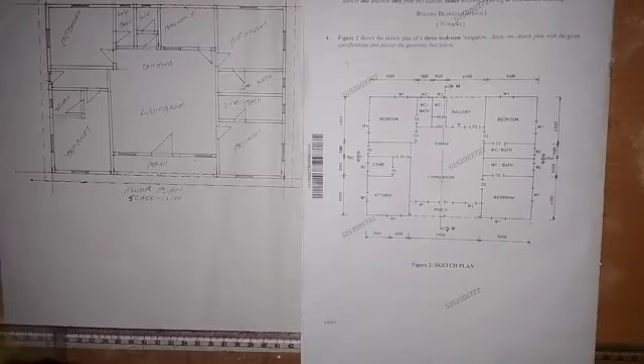Here we are going to be working on the front elevation of this building, as we have worked on the floor plan. So now let's look at what the front elevation will look like. Though we are not asked to draw the front elevation, we are asked to draw the left end elevation, but I want us to make a drawing of the front elevation. Let's see how that front elevation will look.

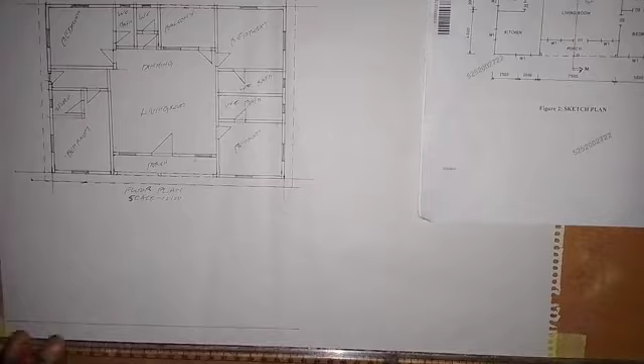Okay, now the first thing that we are going to do for the front elevation is to draw the ground level line. So just draw a horizontal line like this for the ground level line, and then we indicate this as the ground level line. We write GL at this point, so make sure you write it. That's for the ground level line. So that's the first thing that we are going to do.

The ground level line is where the floor on the outside of the building is, where you step on before you enter into the building. That is the ground level line. Okay, all right.

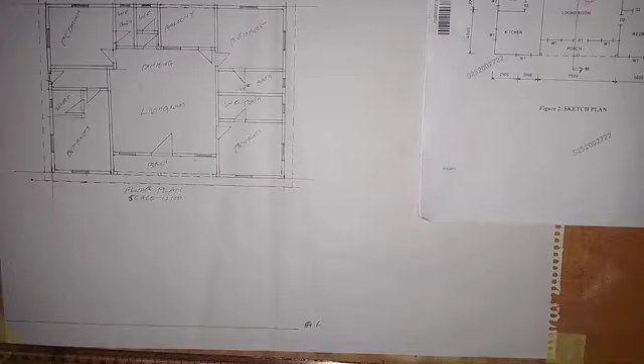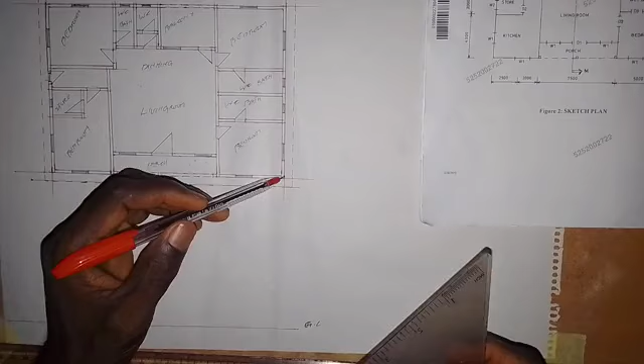So the next thing that we are going to do is, by the time I'm looking at this building in this direction, I'm going to see the edge of this wall. I will see this window, then there's a column here that I'm going to see. I will also see this column, and this column here. I will see this window, I will see this door, I will see this window, and I will see this window, and see the edge of this wall. So those are things that we are going to put here in the front elevation, apart from the roof.

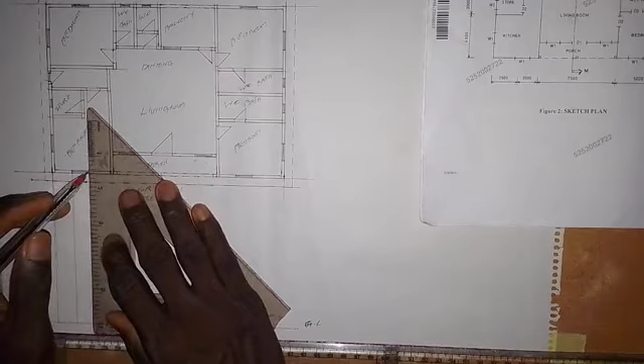So let's start from here. I'm going to draw a vertical line down here. It's okay. So draw a vertical line down here. Then for this window, I'm going to draw a vertical line down like this. Here also I will draw a vertical line down like this for the width of the window. This makes my work fast. And then at this point, I'm going to draw a vertical line down here.

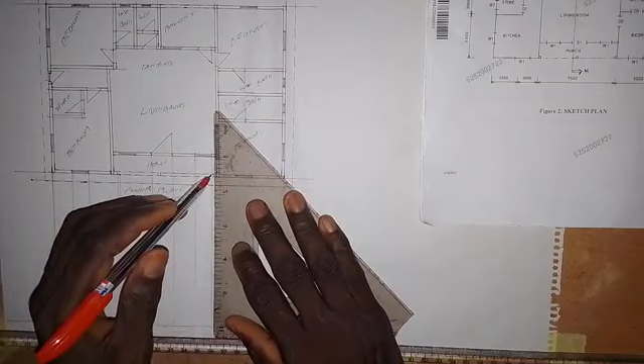So here also I have a window here, so at this point I will take this vertical line down. And coming here also, I will draw a vertical line down here. And then for this door, I will draw a vertical line down, and at this point also I will draw a vertical line down. Okay, so at this point here I will also draw a vertical line down here, and then here I will also take a vertical line down. Then here I have a column, so like this, take a vertical line down.

So then you can see this window also, I will draw this vertical line for this window, and then at this end here I'm going to draw a vertical line. That's the edge of the wall.

All right, so the next thing that we are going to do is to take a measurement of the floor level. So I will take 1.5 millimeters, and we are going to draw a horizontal line here like this, for the floor level.

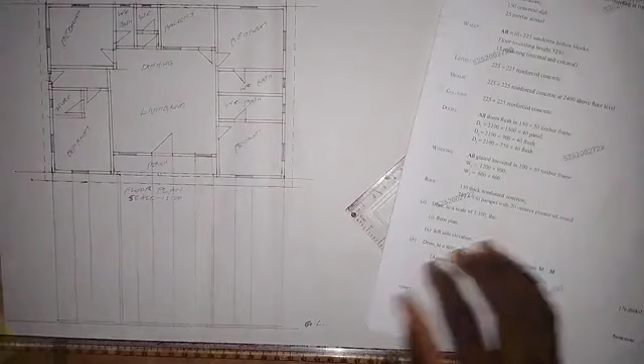Okay, so having taken the measurement of the floor level, the next thing that we are going to do is go to the roof. So we come back and work on the other components that we are going to see here in the front elevation. So for the floor level, we come here.

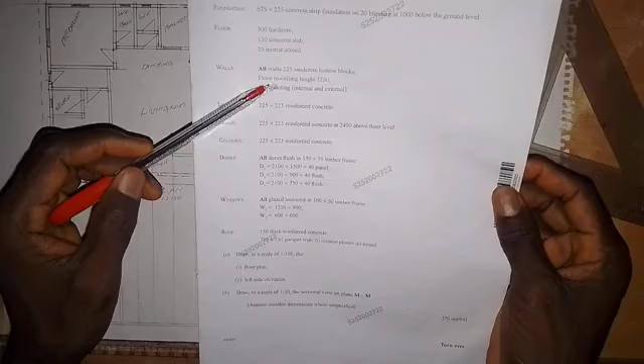So for the floor to ceiling height, floor to ceiling height is given here as 3,250. If we divide that by 100, that gives us 32.5. So I will take a measurement of 32.5 from this floor level line. I will take 33 millimeters. This is 33 millimeters here.

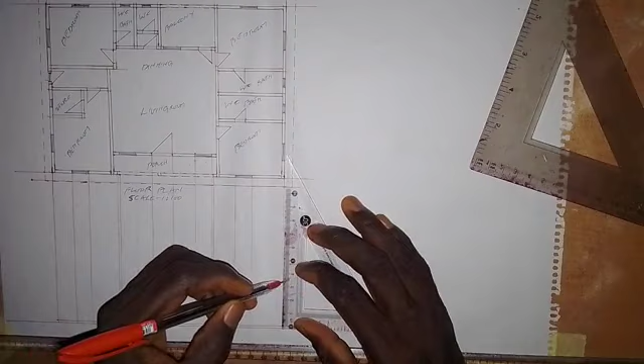At this point here, I'm going to draw a horizontal line from here to here.

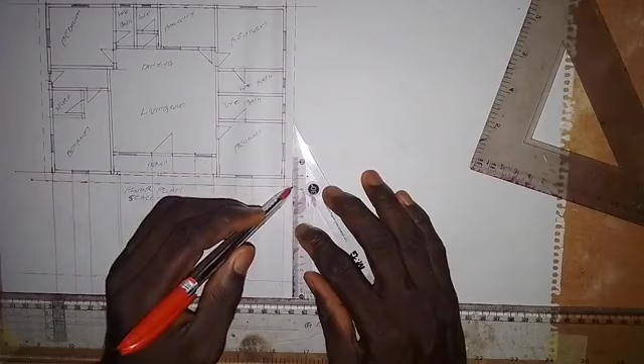All right, so then the next thing that we are going to do, this is the projection that we have here, we have to bring it down, down to this point. So we have not yet looked at the type of roof that we are given, we are going to look at it. So we also need to draw this line down here for the eave projection.

Alright, so now let's go to the roof. For this type of roof, they specified 150 thick reinforced concrete and a 750 by 150 parapet with 20 cement plaster all round. This type of roof is a parapet roof, or flat roof, parapet or flat roof. That's the kind of roof we have here.

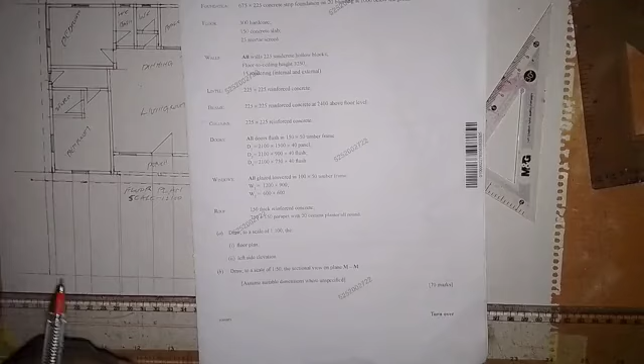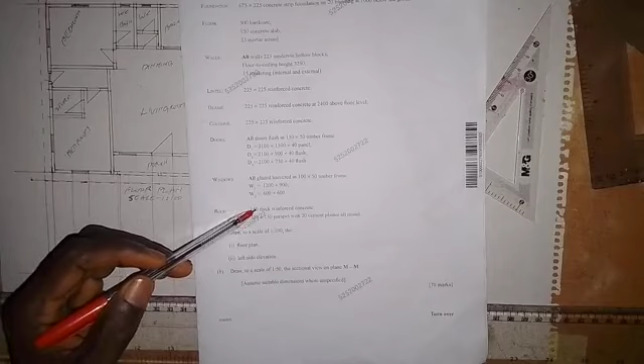So we have a concrete slab of reinforced concrete, 150 thick. Then we have a parapet of height 750 over it, and the thickness of that parapet is 150. So we are making use of this 750.

So 150 by 100 will give us 1.5. But I will take it as something like, for us to be able to see it, I will take it as 2 millimeters. So it is approximately 2 millimeters at this point.

So for the reinforced concrete, we are going to draw a horizontal line from here to this end here. So we have the horizontal line.

Next is the parapet. 750 by 100 will give us 7.5, approximately 8 millimeters. So here I will take a measurement of 8 millimeters. There is no coping on this, so I'm not going to worry myself with that. So here we are going to draw a horizontal line here like this.

So the roof is just what we see here. Another thing is that this line is not straight. Okay, so we have it like this.

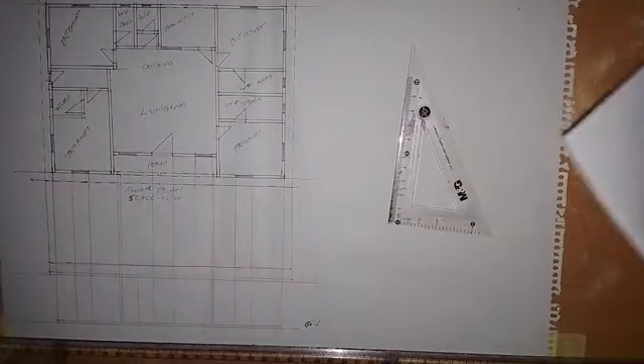So another thing we are going to do here is that the thickness of the parapet is 150, and 150 by 100, that's 1.5, which would be approximately 2 millimeters. So where are we taking that 2 millimeters? Above the concrete slab.

So we take a measurement of 2 millimeters inward. This is 2 millimeters here. I will come here and take a measurement of 2 millimeters to this side. This is 2 millimeters. So at this point, there's going to be a hole within the roof, which you can't see, so we are going to use this to represent it.

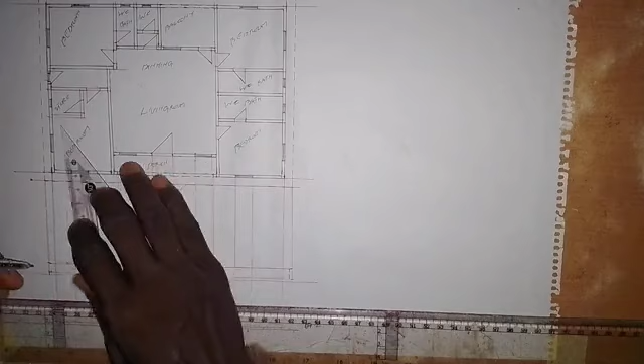So I'll come here also and represent it here like this, and this line I'm going to make a thick line, and this line also I'll make a thick line from here to here. Then this line up here, we are to make it a thick line from here to this end here, so from here to here.

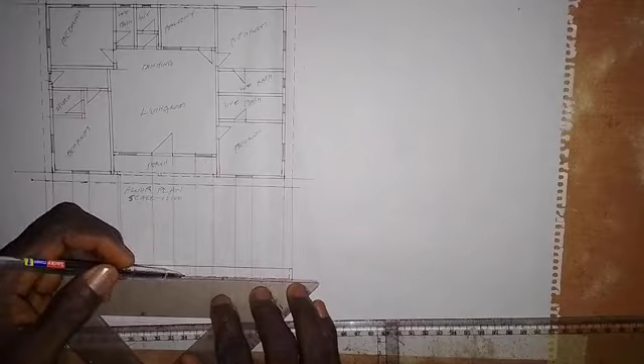And then for this line that we have here, we are going to make a short dashes line, because we can't see that hole within the roof from outside. So we have to make a short dashes line as I'm doing it here. Okay, so you have to draw this.

Very simple to draw. So we have this. So this line now, we need to make this line a thick line, so make it a thick line from here to here, like this. Okay, so we have this.

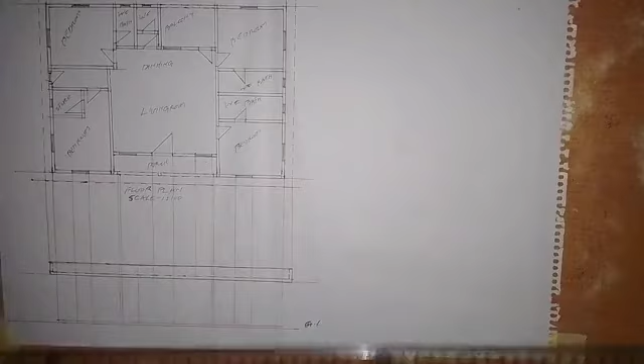So other things we are going to do here, this line will be a thick line from here down. And then for the column that we have here, so this will be a thick line from here down. And then we also have a column here, so this will also be a thick line from here down here. So we also have a column here, which I didn't draw.

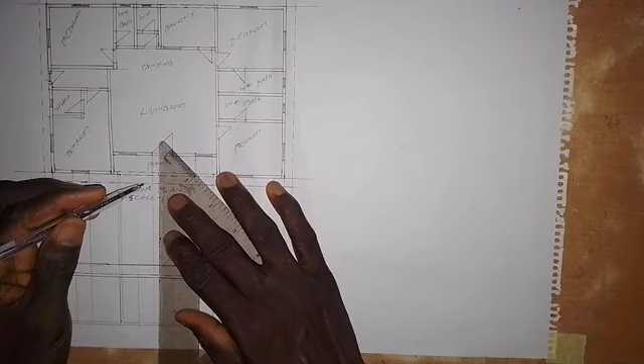So okay, we are still going to have a beam, so don't let me draw that yet. So this line, we need to make it a thick line from here to here.

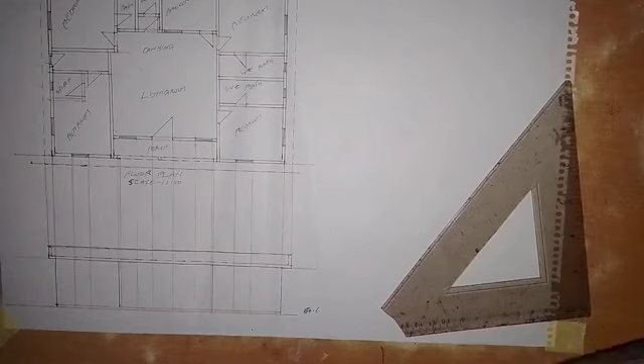Alright, so let's fix the windows and the door. Let's start with the door. The door has a height of 2,100, that's 21 millimeters. So we have the door here. Above this floor level line, take a measurement of 21 millimeters up. So this is 21 millimeters.

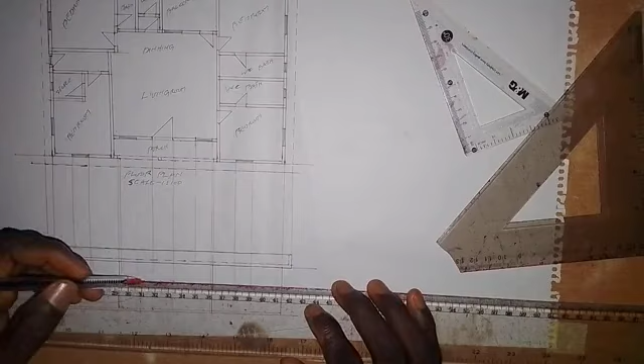So at this point, we are going to draw a horizontal line, because the top of the door also determines the top of the window. So I will draw this line here and this, and then we have this, then we have this one here. So I can go and work on the door.

So for the door, this type of door is a panel door. So this door is a panel door. So I need to work out the frame. I'm going to work out the frame here, just the frame, just take 1 millimeter down here.

So this is, I don't have to measure that. I don't normally measure that.

Draw this line like this, and then draw this. Come out a bit, so draw this line. So we are giving it a frame. That's the door that we are working on. So here also we draw this line to give the door a frame.

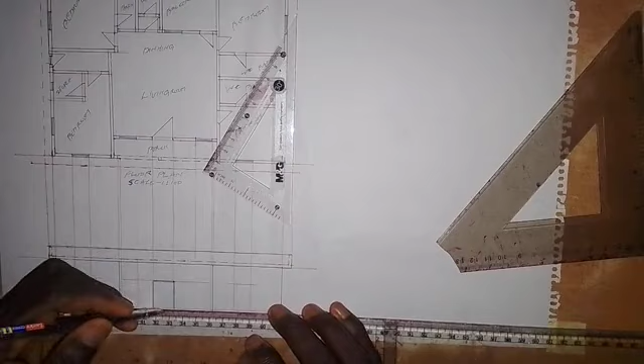So we have this, and then they said that this is a panel door. It's a panel door. So how do I design that? I'm going to break this.

So I just draw a line here, and then draw a line here. Then I'm going to break this, I just design it like this. So these are panels.

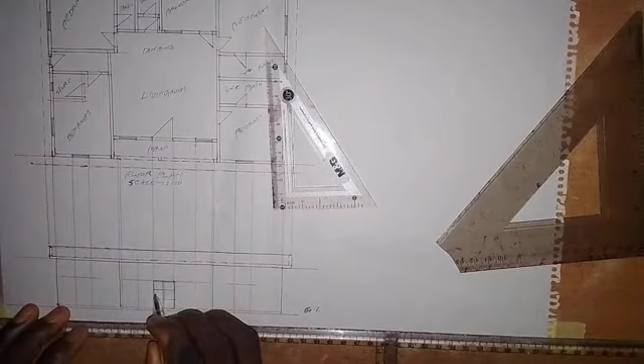Alright, so we have this. So this is a panel door now. So I can just put something here for the lock. So we have this, that's the panel door.

So let's design one window. I'll just design one of the windows, and the rest you can go on and produce. So we have a window here. I'm going to come out a bit.

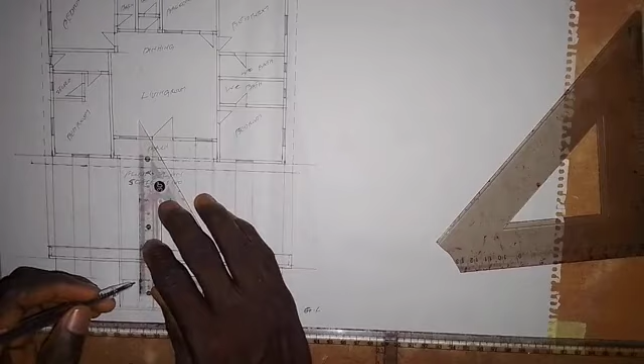So then the height of this window is 9 millimeters. So this is 9 millimeters here.

So here I'm going to draw this line like this, and then come down a bit. So draw for the frame, and then up here. So for the frame, so we have this.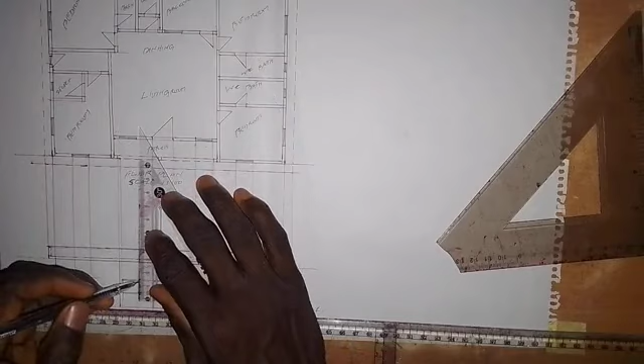So this window, we are told that they are louver windows. They are louver windows. So I'm just going to break this down into small rectangles like this.

Then come down a bit. So draw this one, and then come down a little bit. I will draw, then within this space I will also draw. So we have this, so this is the window.

So other windows for here, for this particular one, they will look like this. But we need to put a beam.

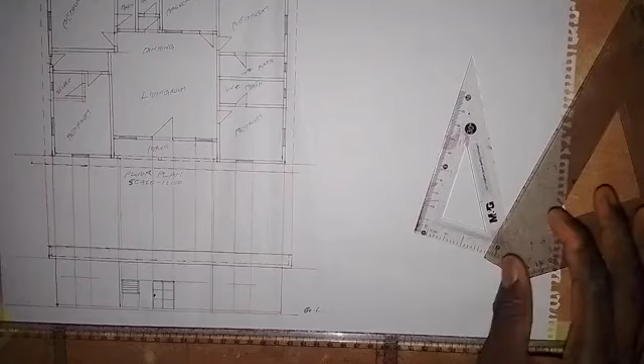So we have a column here. This column here, well, we need to draw it. So let's draw it, so this column, and then before that let's position the beam.

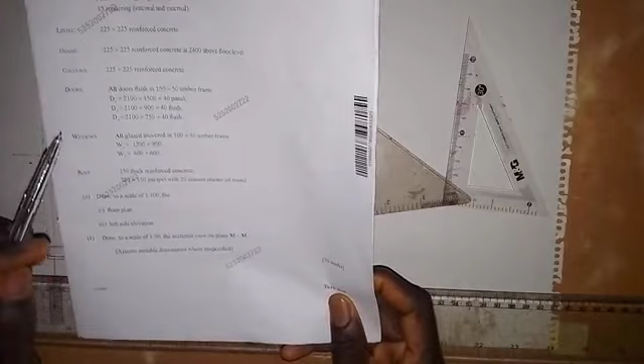So let's see what they talk about the beam. So for the beam, so we have beam. So they said 225 by 225, reinforced concrete at 2400 above floor level.

So you have to take a measurement of 24 millimeters up, 24 millimeters up for the beam. So this is 24 millimeters, that is its distance from the floor level.

So we now make this from here, so make it a thick line from here to this end like this. So that's for the beam. So we have the beam like this here, this is the beam.

Alright, so we have this for the beam. So that's what we have.

So we can now design this window here, then we also design this window here. So that's what we are going to. But let me design the window, so let's design the window, I wanted to pause the video.

So let's work on this window here. Let's first of all take 9 millimeters down, this is 9 millimeters. So I'm going to draw a horizontal line here like this. Then I will come out a bit here.

So make this a thick line, that's for the frame, and this also a thick line for the frame, and come down a little bit here. So we have this.

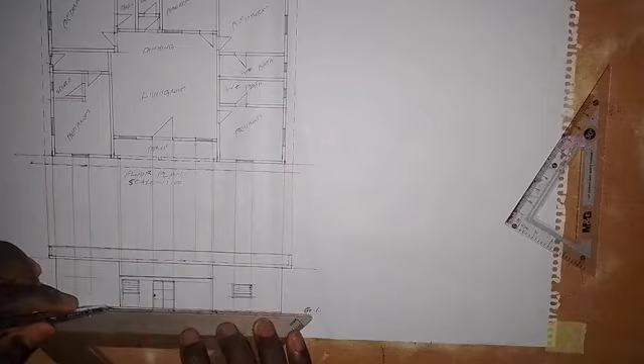The floor inside the building you can't see from outside, and also for this one you can't see from outside. So we have this.

Alright, so and then another thing that we have to put here, so the column that we have here, I'm supposed to draw it here, so it will cover part of this door and here, okay, touches the beam.

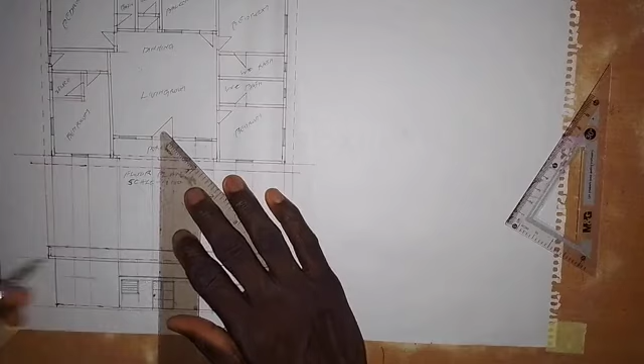Alright, so that is the column that we have here, so this is how it will be.

So apart from this window and this window that we are used to fix, so after that, write front elevation here and write the scale. It's as simple as I've done it here, all you have to do is to practice. Thank you, keep on practicing, and God bless you.